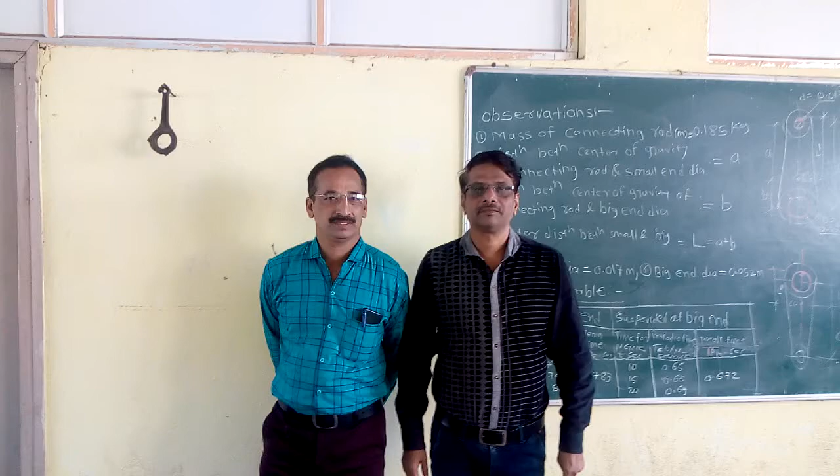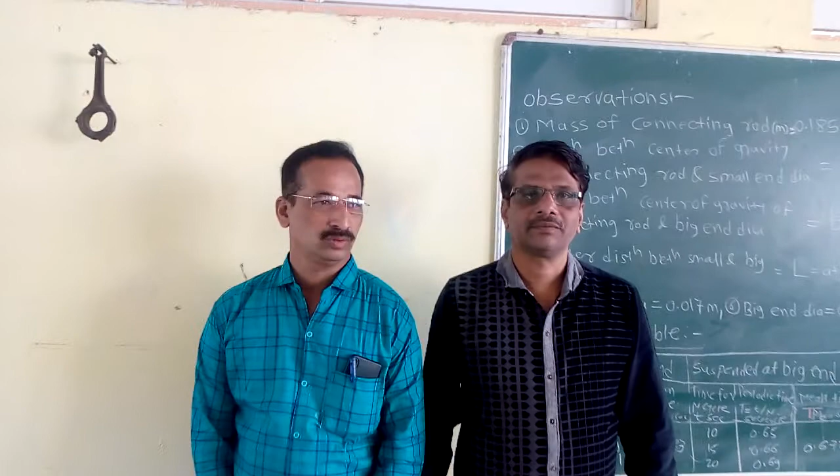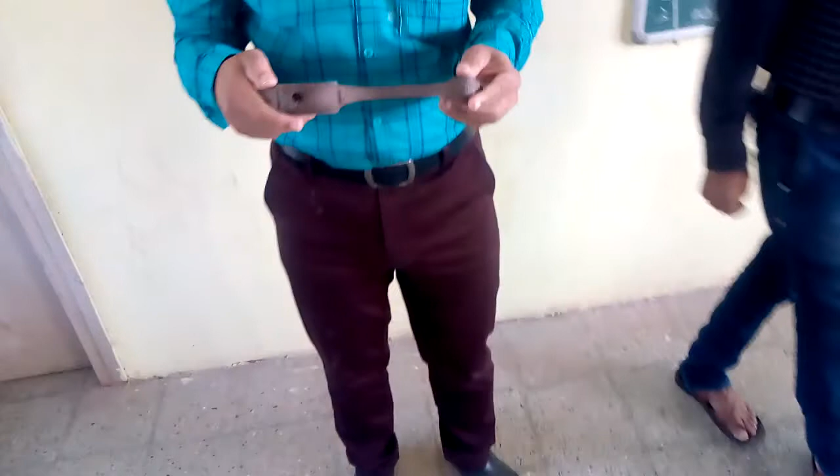Today we are going to demonstrate the experiment: determination of mass moment of inertia of a connecting rod using the compound pendulum method. This connecting rod is an irregular shaped body, and there is no standard formula available for determining the radius of gyration or locating the center of gravity of the connecting rod.

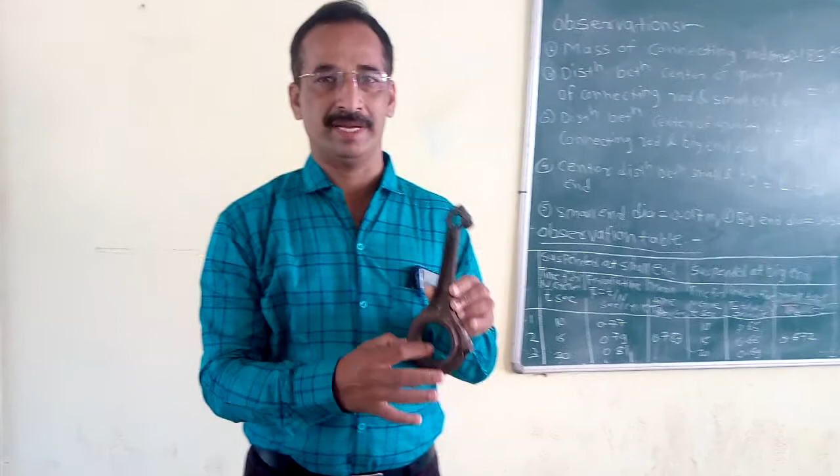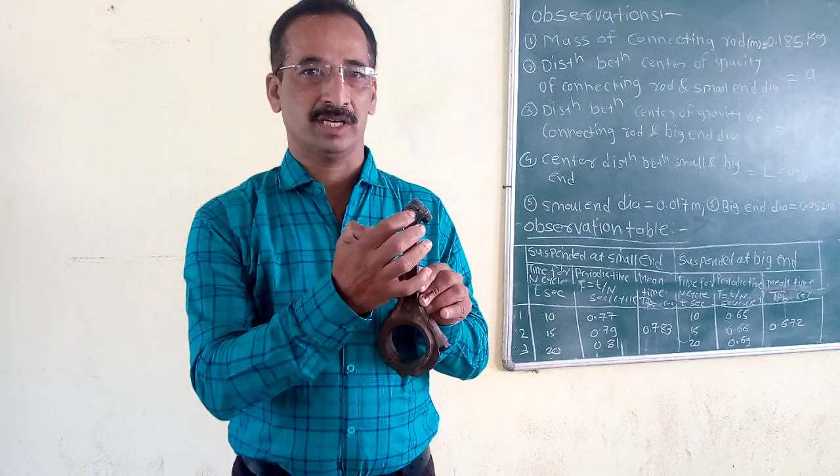This connecting rod has a small end and a big end. In the manual, the mass of this connecting rod is given, along with the small end diameter, denoted small d, and the diameter of the big end, denoted capital D.

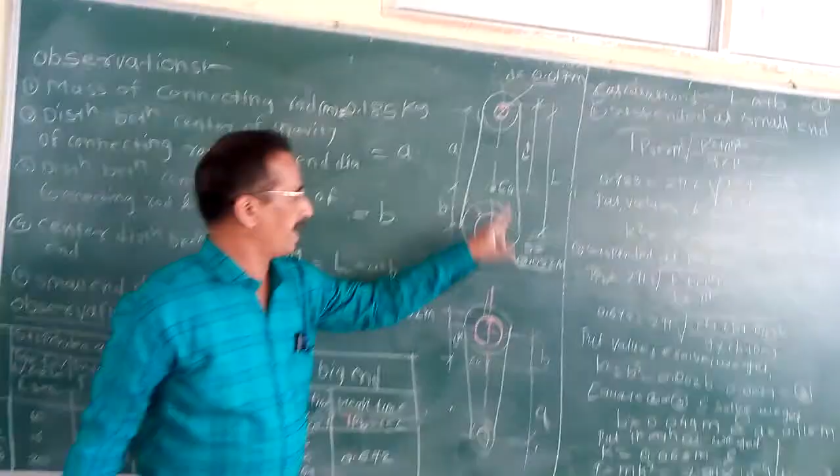Now with the help of a vernier or scale, you can measure the distance between the small end center and the big end center, which is defined as L.

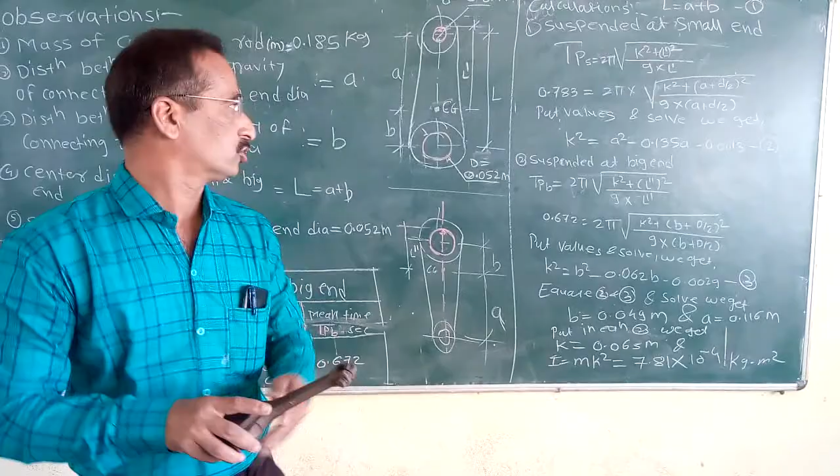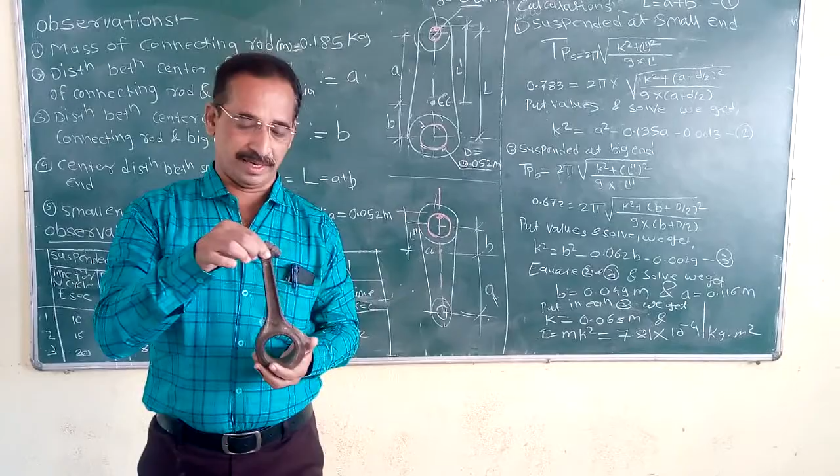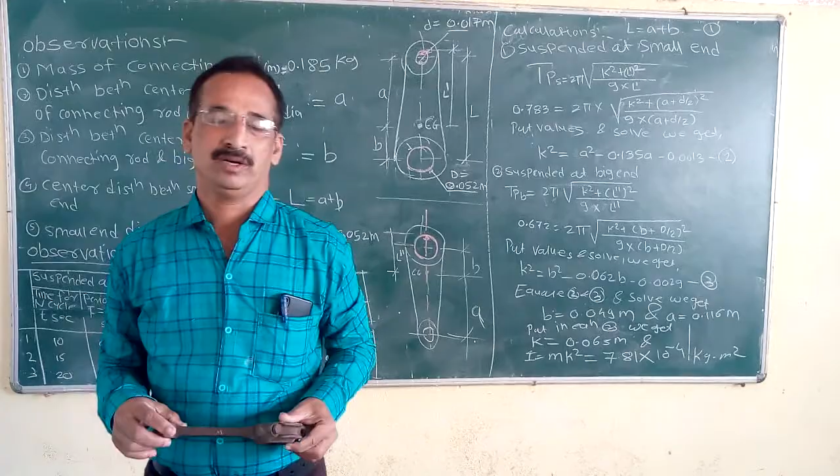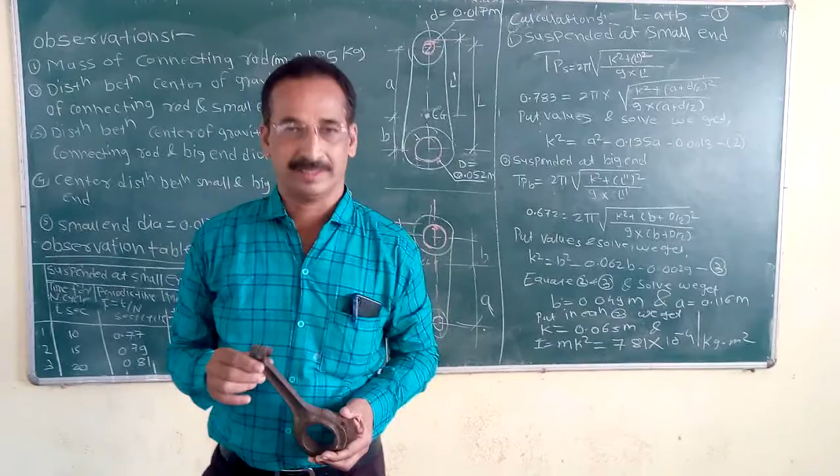During the experiment we find the time period by suspending it at the small end, and also by suspending it at the big end. A compound pendulum is a rigid body suspended vertically that oscillates under gravitational force with small oscillation or small amplitude.

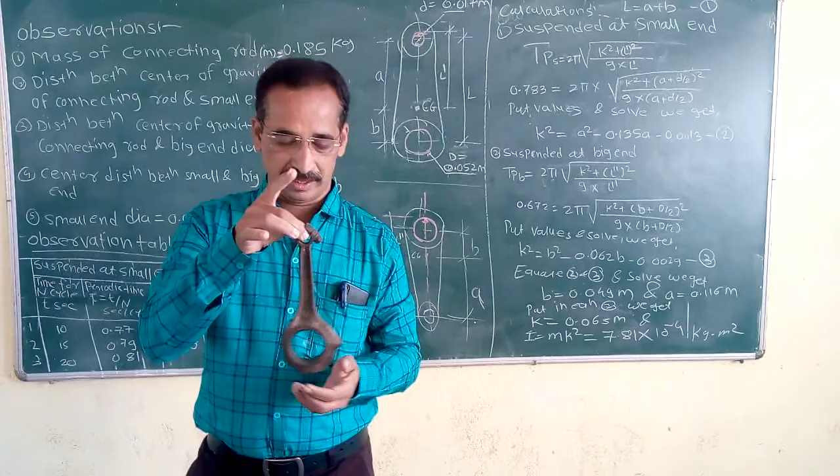So we treat this connecting rod as a compound pendulum, suspend it vertically, give it a disturbance so that it oscillates with small amplitude, and measure the time.

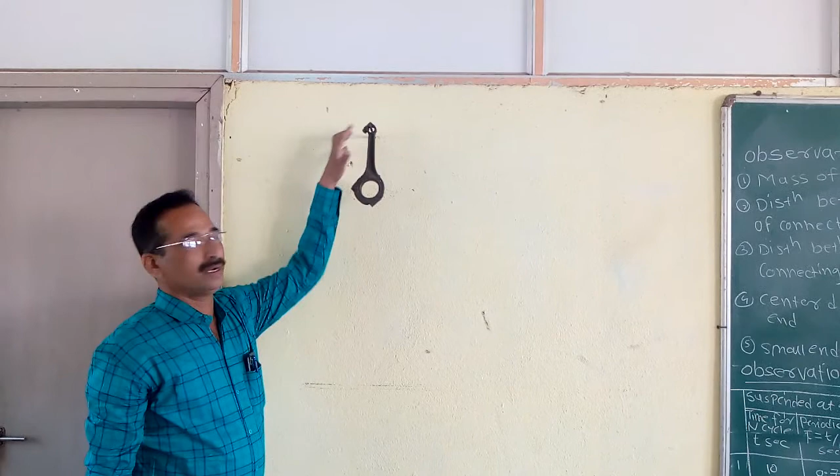Now we conduct the experiment procedure. This is the point of suspension. Initially I suspend this connecting rod vertically at the small end, give it a small disturbance, and measure the time required for n number of cycles.

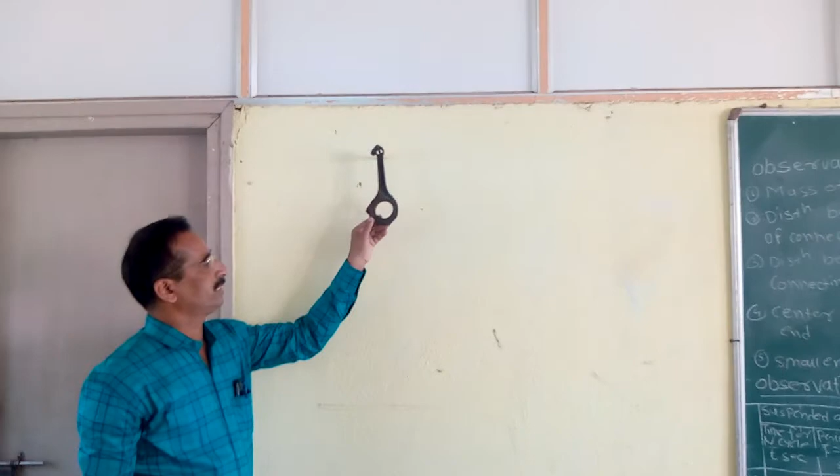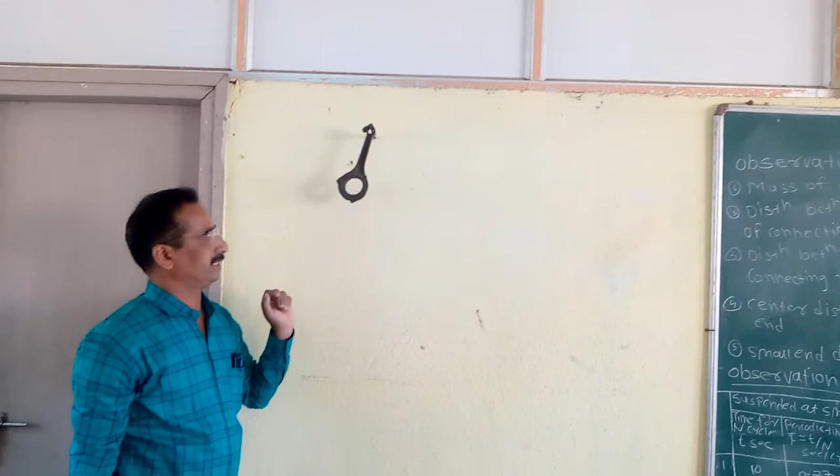During the experiment, first we kept n as 10, for the second observation n as 15, and for the third observation n as 20. We measure the time period for these cycles with the help of a stopwatch.

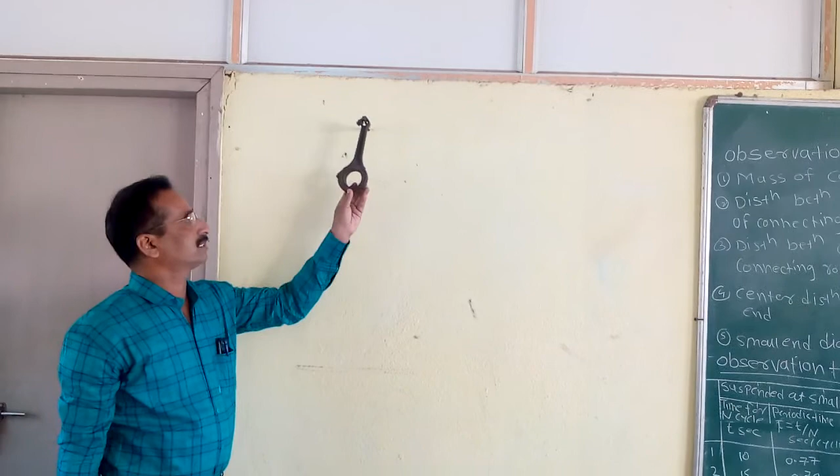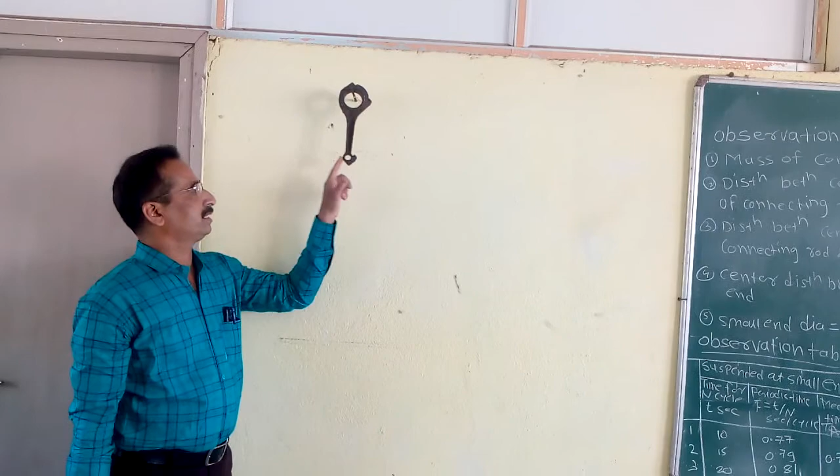Now repeat the same procedure by suspending it at the big end. This connecting rod is suspended vertically at the big end. Disturb it and measure the time required again for 10, 15, and 20 oscillations. These observations are recorded in the observation table.

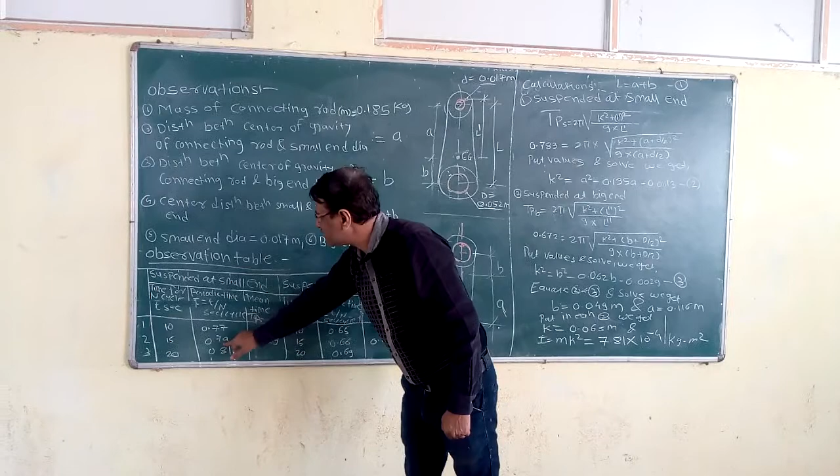The next part, observation, observation table, and conclusion, is explained by my colleague Dr. M.S. Dharashulkar. Observe that the time for 10 cycles is 0.77 seconds, time for 15 cycles is 0.79 seconds, and time for 20 cycles is 0.81 seconds.

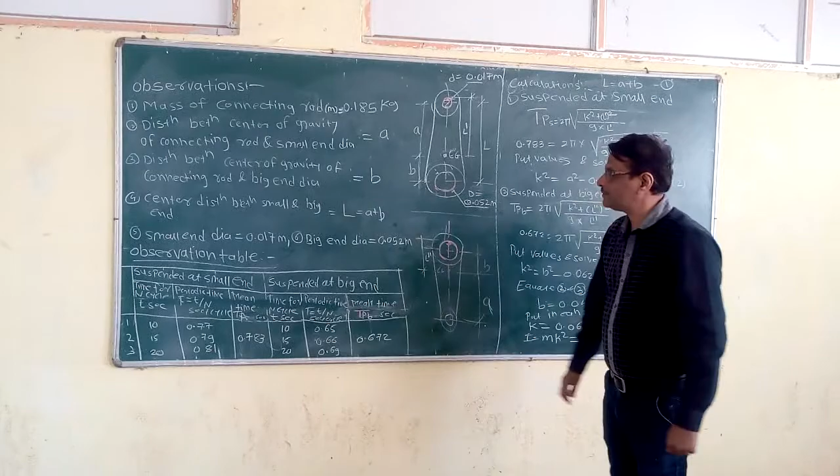In the same way, when the body is suspended at the big end, observe that time for 10 cycles is 0.65 seconds, time for 15 cycles is 0.66 seconds, and time for 20 cycles is 0.69 seconds.

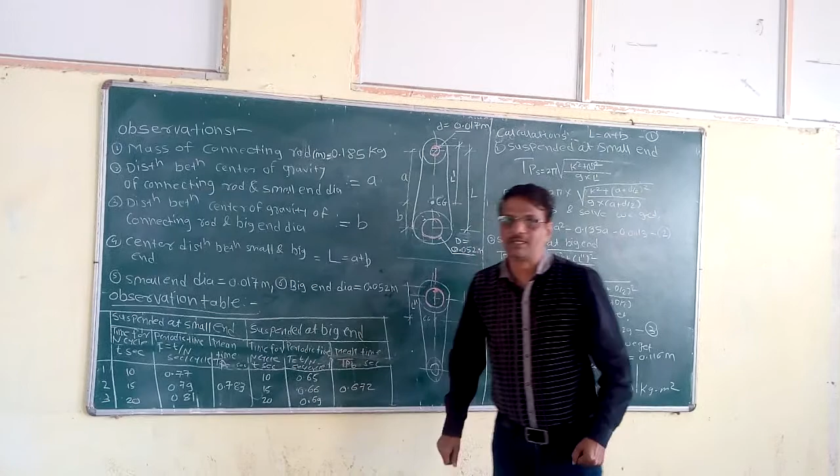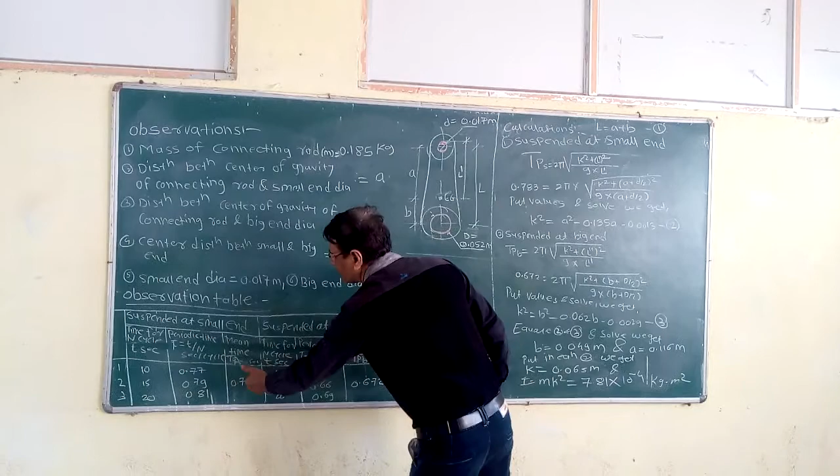Now the mean of these three has been taken. From the big end, the mean is observed to be 0.672 seconds. From the small end, the mean is 0.783 seconds.

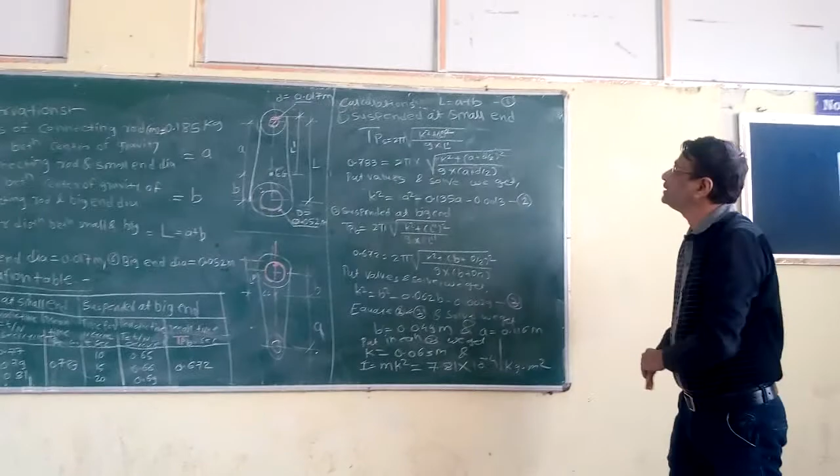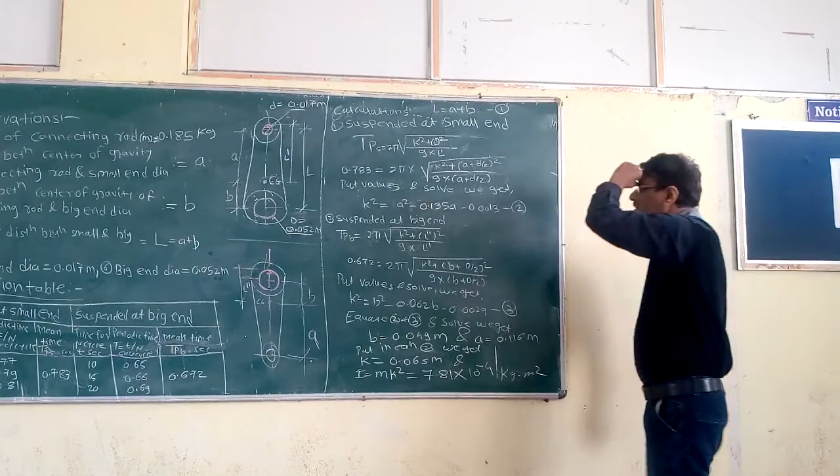Now let us move toward the calculations. L is equal to A plus B, and is the distance between the center of the big end diameter and the center of the small end diameter. It is equal to 0.165 meters. Now this is the formula for TPS.

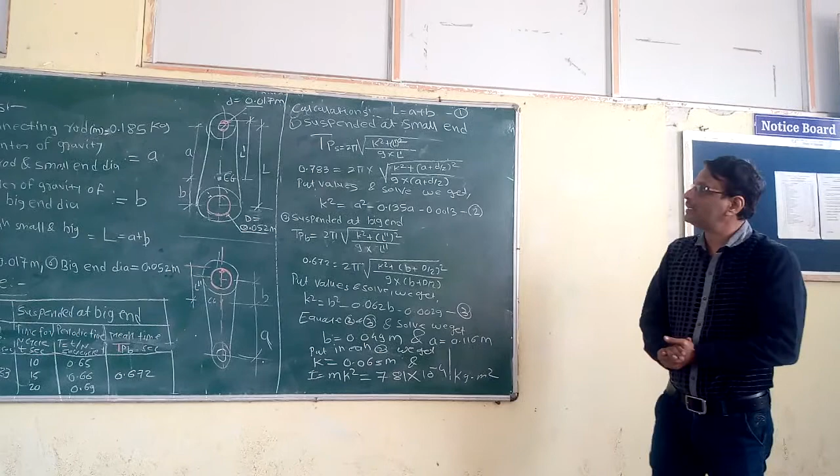What is TPS? It is the time period considered by suspending the connecting rod from the small end. It is equal to 2 pi times the square root of (k squared plus L dash squared) divided by (g times L dash).

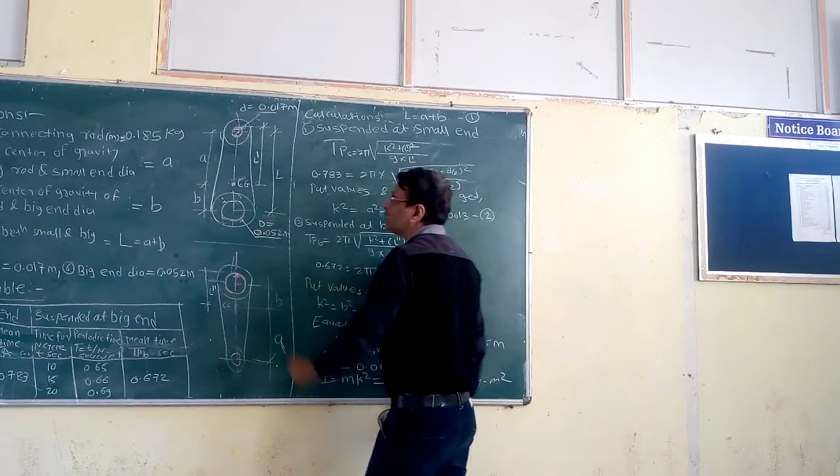What is the distance L dash? L dash is the distance between the CG and the suspended point from the small end. This is the suspended point from the small end, so this distance is considered as L dash.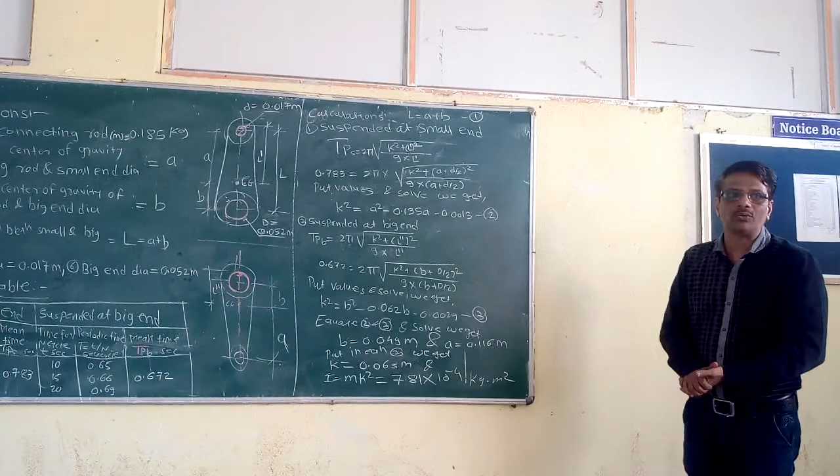Now the mean time period calculated by suspending it from the small end is 0.783 seconds. It is equal to 2 pi times the square root of k squared... k is not known to me. K is nothing but the radius of gyration; it is not known to me. Plus L dash. So how do we find L dash?

That we are going to see here. What is L dash? This is A, and this is going to be the radius.

This is going to be the radius. It is nothing but d by 2. So this distance from the center of the small end and CG is nothing but A, and this distance is R.

I want the distance of suspension from the small end. It is nothing but small d by 2. So it is k square plus A plus d by 2 bracket square, divided by g into A plus d by 2. Now put the

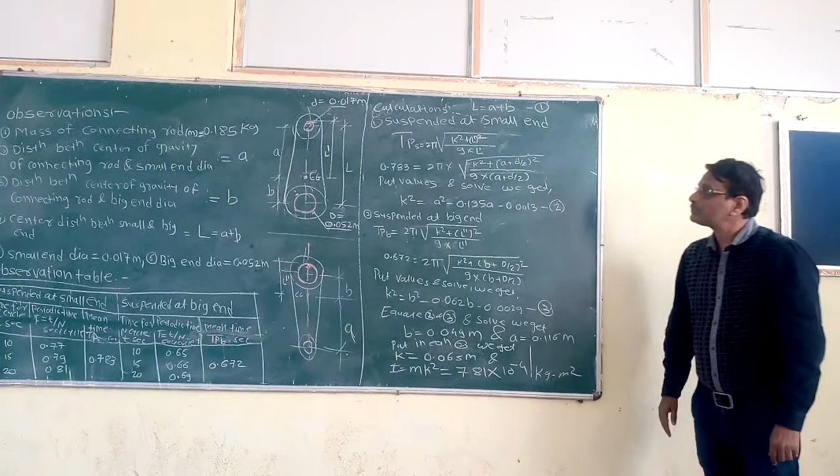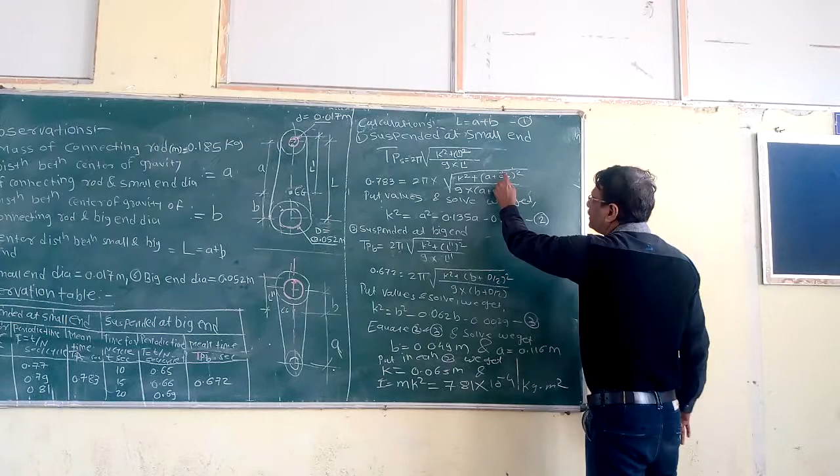corresponding values, and after solving we will get k square is equal to a square minus 0.135a minus 0.0013. So here we have substituted a is unknown to me, but d is known to me.

This is nothing but the small d diameter. It is nothing but 0.017 meter, so it is 0.017 divided by 2. So this way you get one equation. What is equation 2? It is nothing but k square is equal to a square minus 0.135a minus 0.0013.

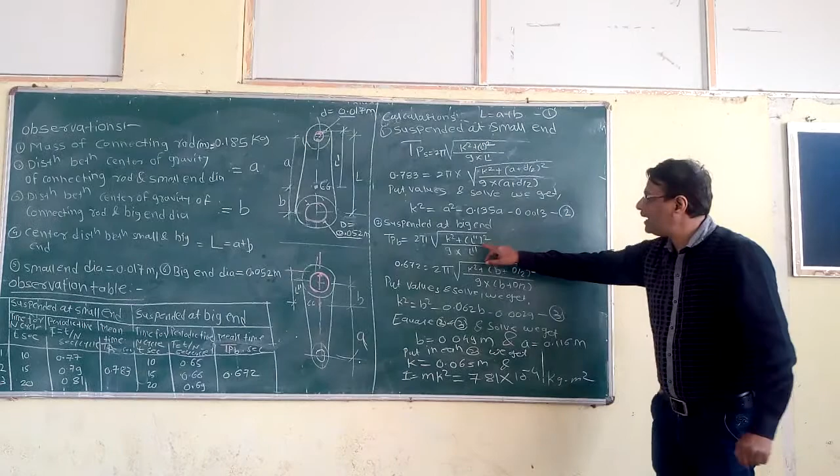Again, the connecting rod is suspended from the big end. Now it is nothing but TPB is equal to 2 pi under root k square plus L double dash bracket square divided by g into L double dash. What is L double dash? It is nothing but the distance of suspension from the big end and CG.

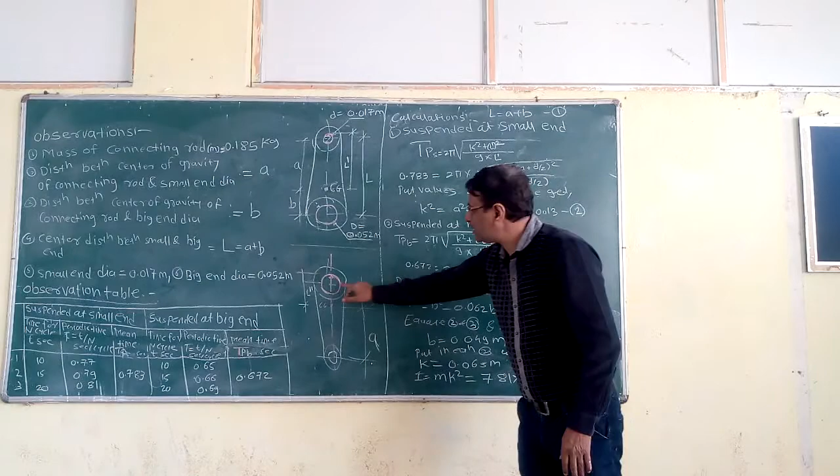So this distance is B. This is the central distance between the CG and the center of this big end diameter, that is B. But I am interested in finding out the distance L double dash. It is nothing but B plus capital D by 2.

It is nothing but k square plus B plus capital D by 2 bracket square. What is the value of D? Capital D, it is given here. It is nothing but 0.052 meter, or it is 52 millimeter.

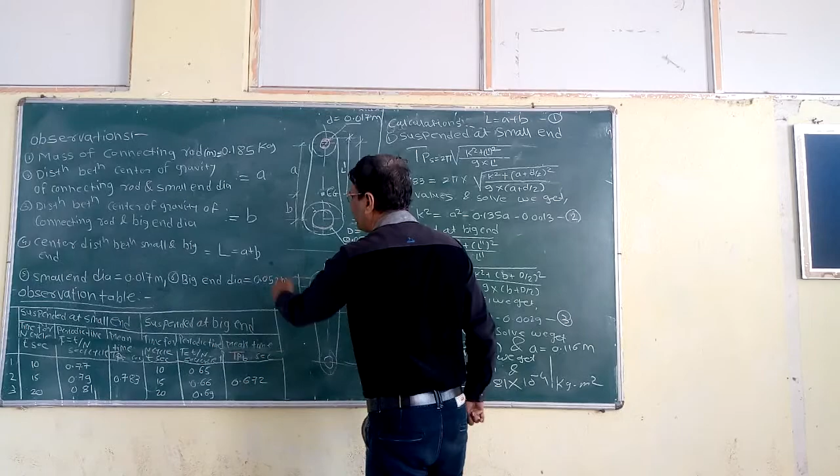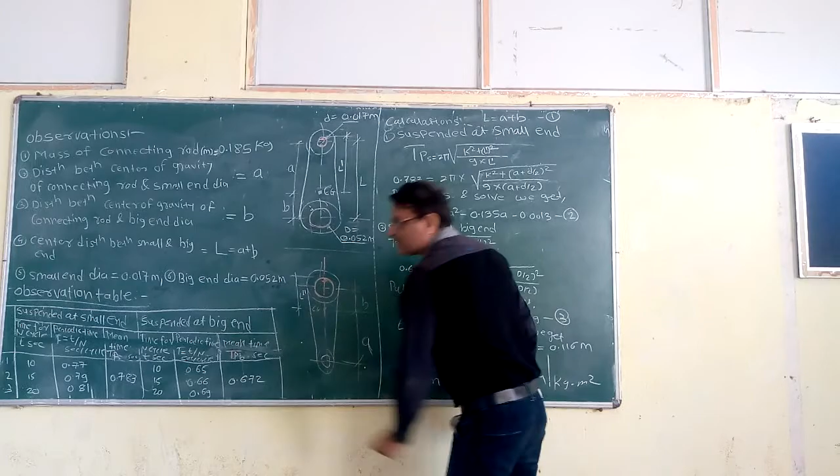Now put the values here and solve this equation. What is TPB? It is nothing but 0.672 seconds per cycle. It is equal to 2 pi into bracket k square plus b plus 0.052 divided by 2 bracket square divided by g.

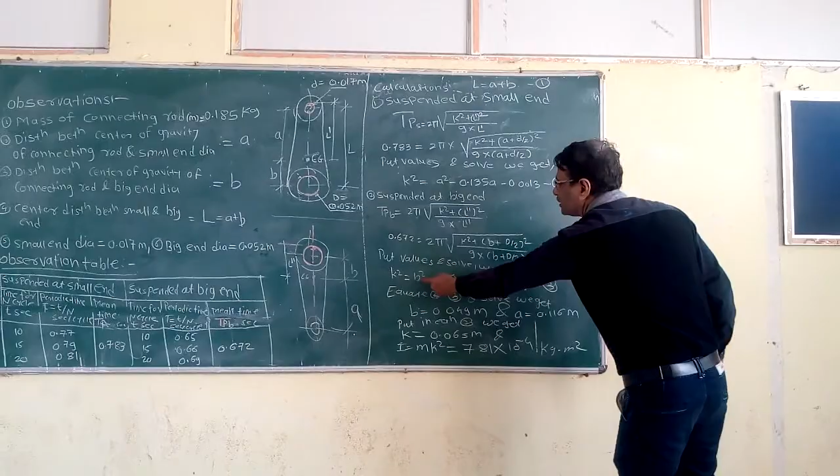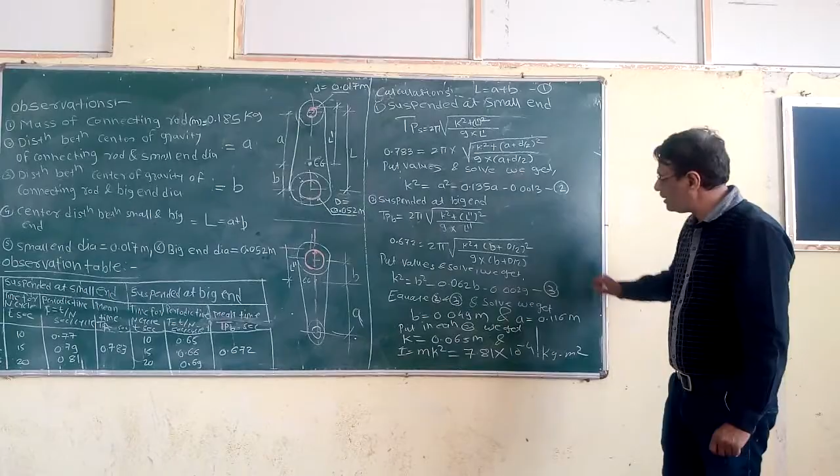It is nothing but 9.81 into b plus 0.052 divided by 2. Put the values and solve this equation, you get k square is equal to b square minus 0.062b minus 0.0029. This is nothing but equation number 3.

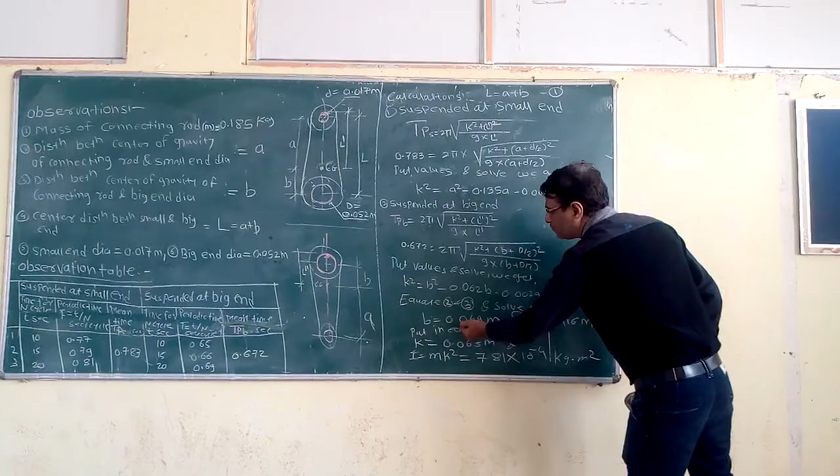Now this is the value for k square. This is also the value for k square. So when you equate these two equations, equation number 2 and 3, you will get the value of b as 0.049 meter and the value of a, it is nothing but 0.116 meter.

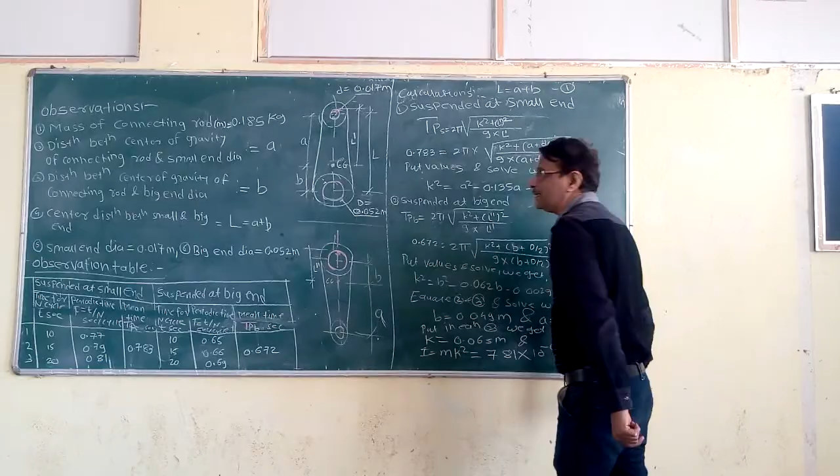Now this is nothing but the distance b, that is the location of CG from the big end center. If you consider this connecting rod, what is the center of gravity? It is nothing but a point at which the whole mass of the body is supposed to be concentrated.

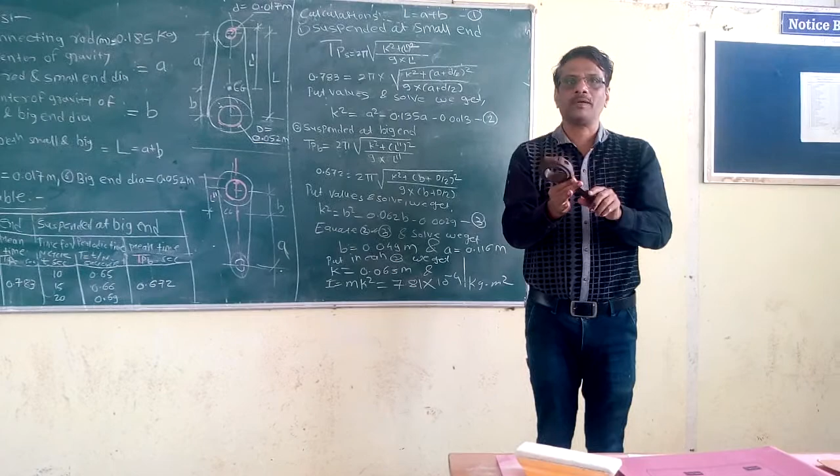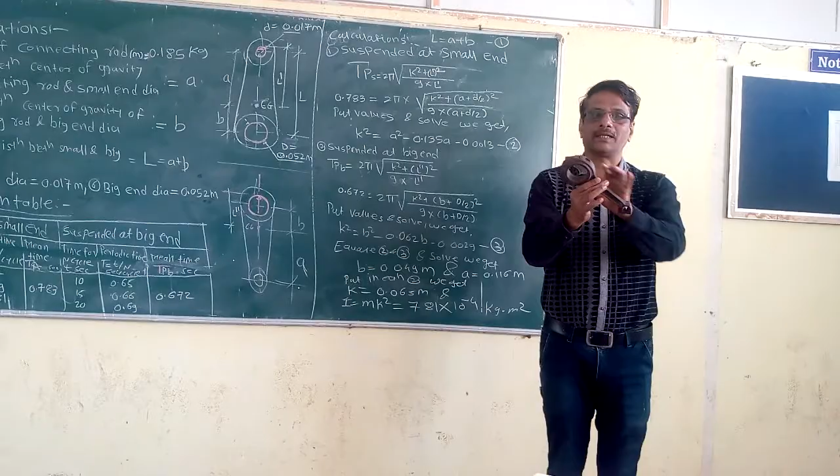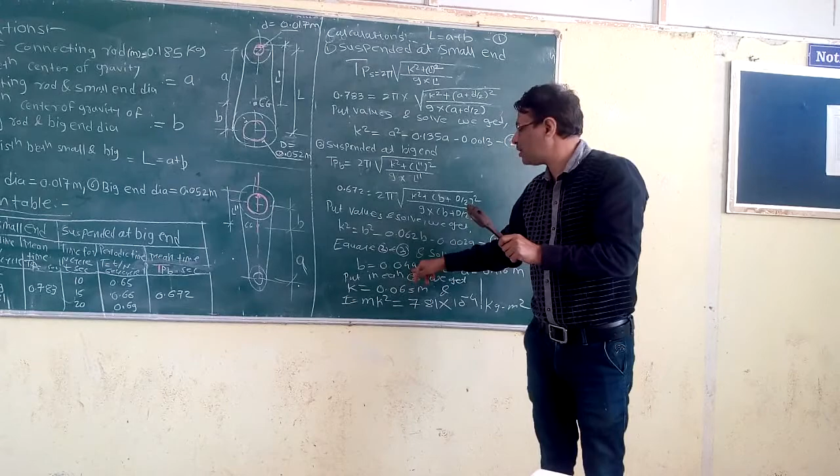Now the CG is deviating towards the big end because the major mass is deviated towards the big end. If you observe it, this is the small end and this is the big end, so major mass is deviated towards the big end. So our value of B is nothing but 0.049 meter, so it is situated somewhat here. So our answers are correct.

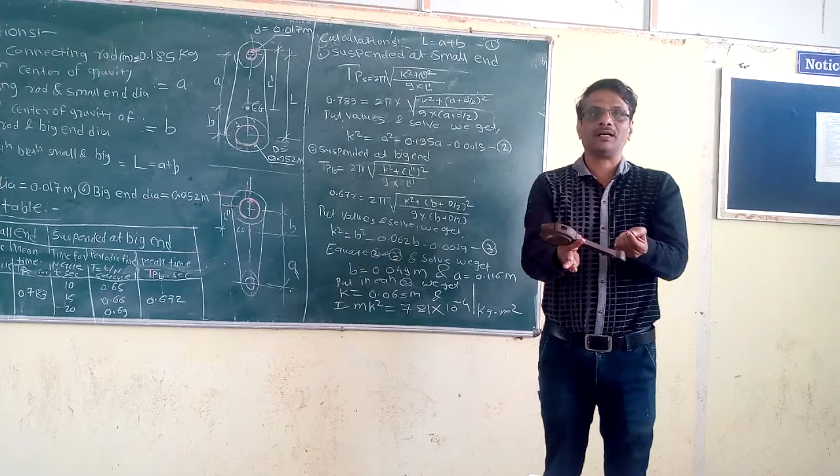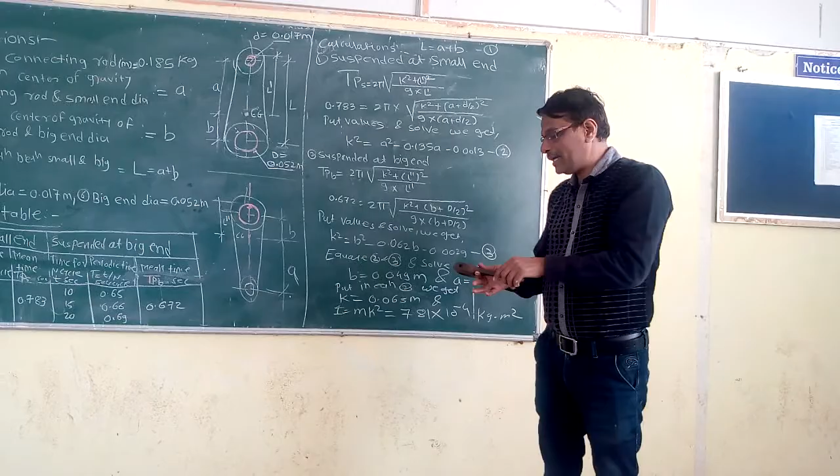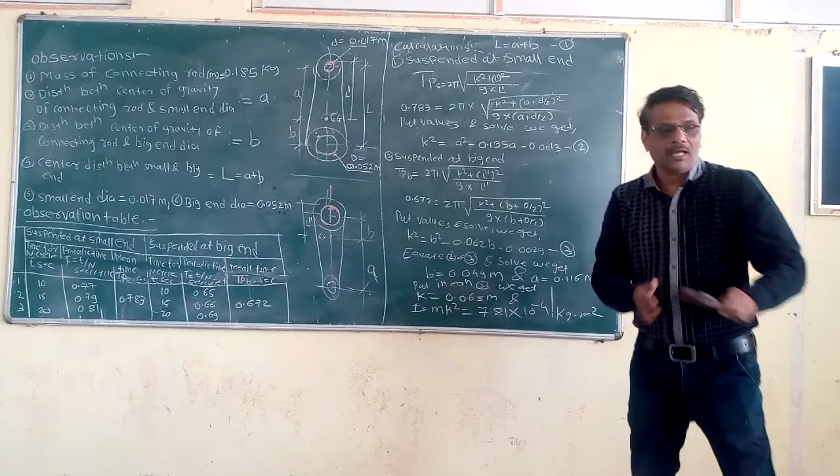If A would have been less than B, then it would have been wrong. But B is coming as 0.049, and B is less than A. So the distance A is nothing but 0.116 meter and distance B is nothing but 49 millimeter or 0.049 meter. Now put these values in equation 2.

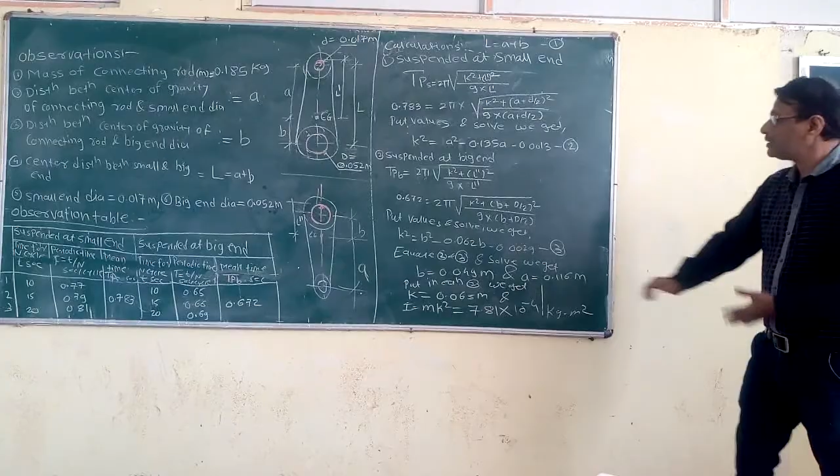You put these values in this equation 2 so that you will get the value of K, it is nothing but the radius of gyration, as 0.065 meter. You will get the value as 0.065 meter.

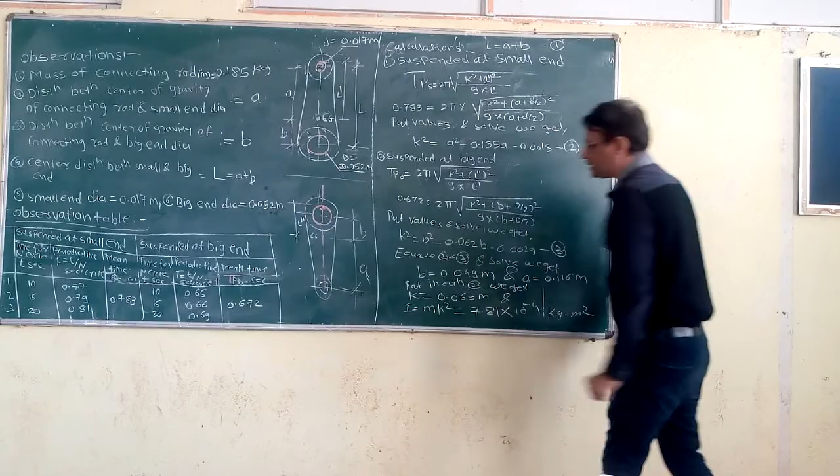And you know what is the formula to find out the mass moment of inertia? It is nothing but I is equal to mk square. Already you know the mass of the connecting rod, it is nothing but 0.185 kg or 185 gram. So the mass moment of inertia is nothing but 0.185 into this

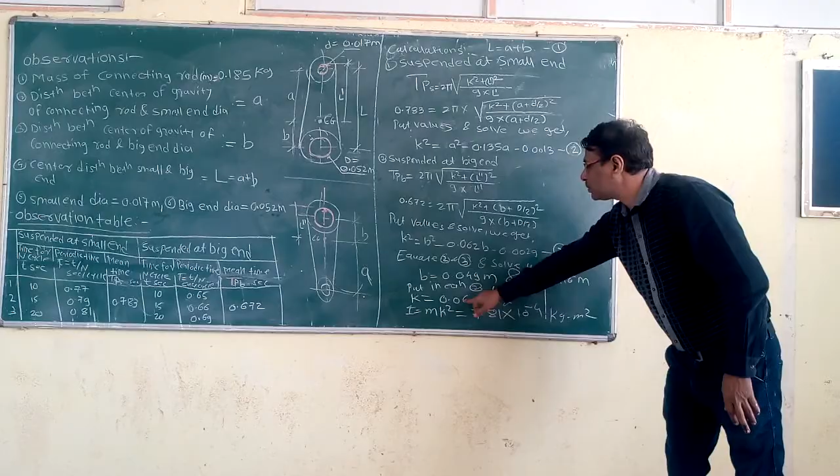0.065 square. I is equal to mk square, it is 0.185 into 0.065 square. So the total mass moment of inertia is nothing but 7.81 into 10 raised to minus 4 kg meter square. Thank you very much.